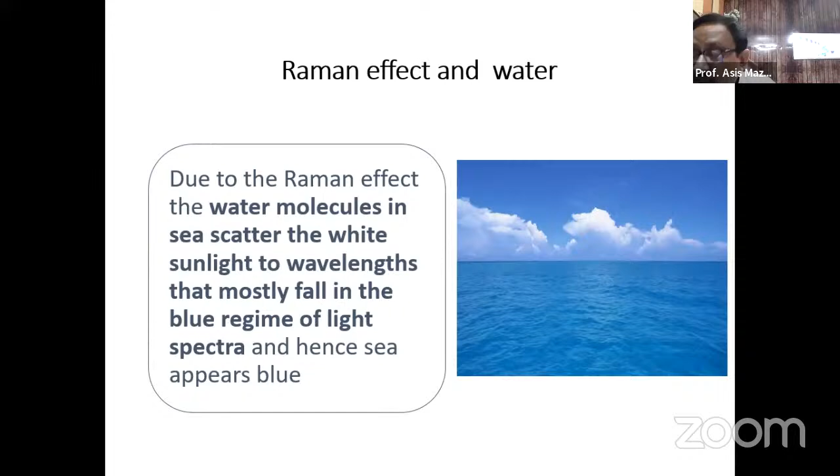The first thing I'd like to show is that due to the Raman effect, the water molecules in the sea scatter white sunlight to wavelengths that mostly fall in the blue regime of the light spectrum, and hence the sea appears blue. So the first slide I have chosen is why the sea appears blue, and this has been found with the help of the Raman effect, showing how the presence of different molecules can influence the wavelength of light.

Now you see the true elixir of life. Initially I took only some salient points from his write-ups. One is that humankind has always searched in vain for an imaginary elixir of life. What we try throughout life is to get something, Amrit. We want to find the Amrit Kumbha, so that by taking a drop of it, we can become immortal.

Am I audible? Am I not audible? Hello? Am I audible? Yes sir, please continue. Okay, okay.

That's why I'm telling you, even if we take some drop of the elixir, we can achieve immortality. But Raman nicely found out the true elixir of life, and that is nothing but water. This single liquid can change the entire scene - our existence, our progress, our development, everything depends on water.

He remembers standing on the line which separates the Libyan desert from the valley of the Nile in Egypt. On one side was the Libyan desert, on the other side, life in Egypt, with the Nile flowing in between. It is very important how we could utilize water for our existence, and how water is important for a civilization to exist. On one side was a vast area covered with sand without a speck of green or a single living thing; on the other, one of the greatest, most fertile and densely populated areas of the Nile.

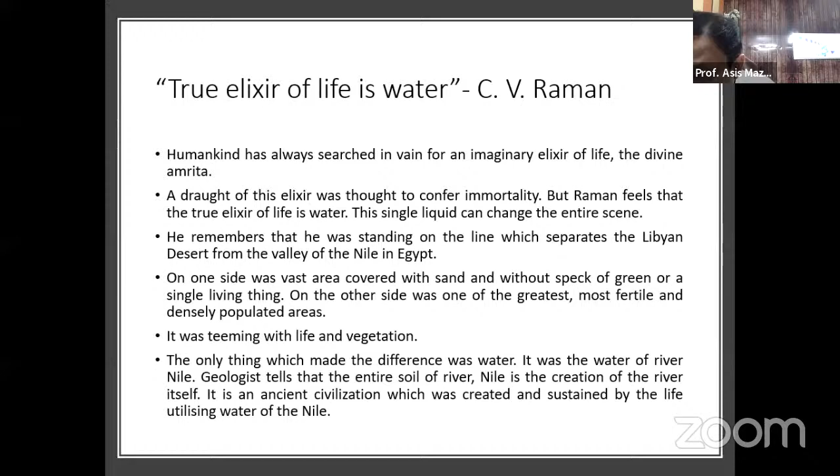We take this common substance for granted in everyday life, but we forget that water is the most wonderful thing on earth, as Raman has told. Most importantly, agriculture, everything, our survival, is dependent on this water.

He has also highlighted the useful and important way how southern India utilized rain-fed tanks. Nowadays we are talking about rainwater harvesting. The Chola regime in South India were the pioneers of introducing big rain-fed tanks and how they were useful in conserving rainwater. So water conservation - we already have shown the path to the world. This is one of the very initial places in the world where the rainwater harvesting concept worked, and successfully worked, for South India. There are other regimes also in other parts, but first is South India, the dynasty of the Cholas.

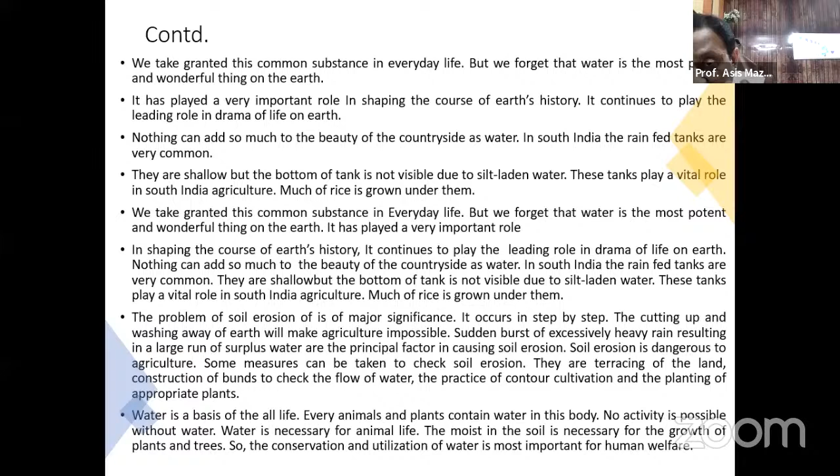Next, if we try to see, he has even written about the problem of soil erosion, how this is becoming an important issue, how we are getting the problem of sedimentation - so many things he has mentioned in his two-page notes, which I have gone through. I am really cherished that our Sir C.V. Raman did so many things, so many concepts, during the 1930s or before.

Now, whatever we are trying to do, let me discuss it. Before going to all the theories, I'd rather prefer to discuss the small things I have done through different projects in the rural areas of West Bengal. I would like to discuss some issues and challenges, but mainly the two case studies which I am fortunate to have implemented in the field. This is embedded with research, but the most important research to me is application research, and that is what I tried to do.

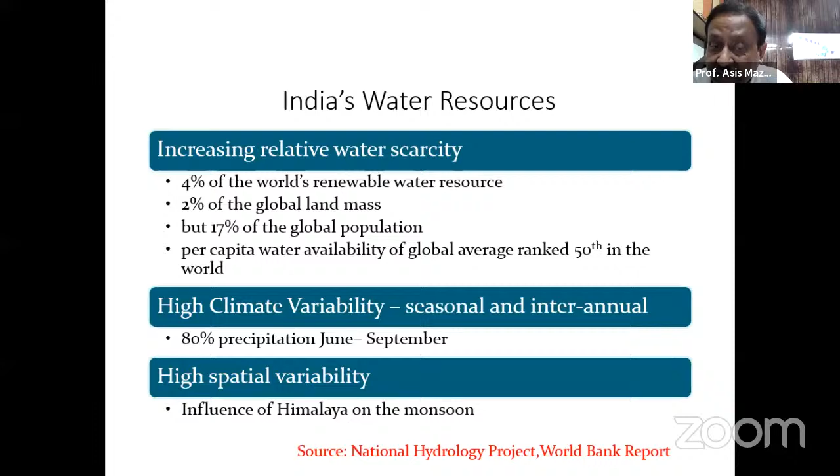Spatial variability is also important, as I've told you. There are a lot of water resource issues in India. I'm going by the headlines - water is critical for our livelihoods. We need water supply, sanitation, and food security. These should be an integrated approach, because that is very important. Today's theme of National Science Day is that these should be taken in an integrated way, not separately. We have to converge our different efforts, because they are interlinked. That is very important.

Water is critical to economic growth in many sectors. Also, our water resource base is stressed because our population is increasing, and with that we are also polluting - understandingly or without understanding, with greed - and that needs to be checked, controlled, monitored, and treated. That is very important.

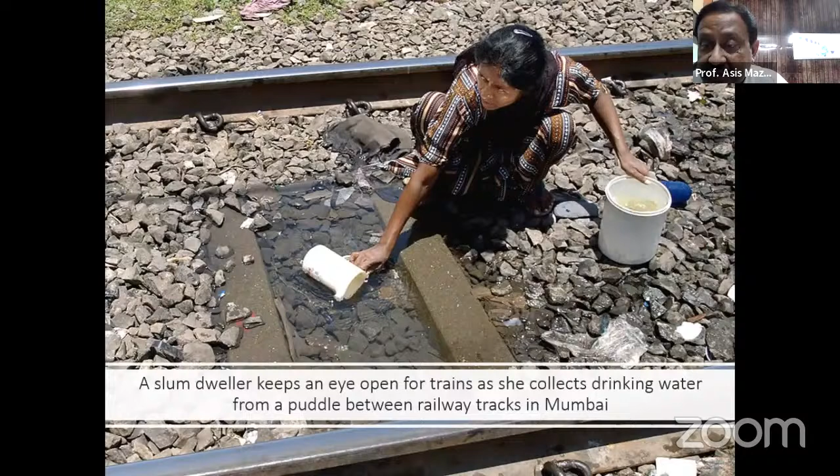You see, one of our mothers is taking water from a puddle between the railway tracks in Mumbai. That is also one of the things we face.

There's a groundwater bill, innovative irrigation, global partnerships, and NITI Aayog has sought to establish a composite water management index for the country. This index is expected to create a public national platform providing information on key water indicators across states. But every administration, in any state, has to come up to reach the national goal, because without this data you won't be able to do anything.

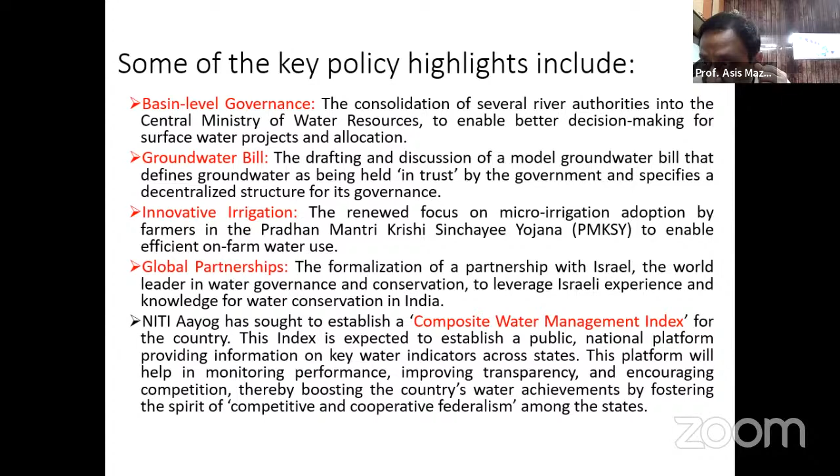And you see, this is the depth to water level map. This is all available.

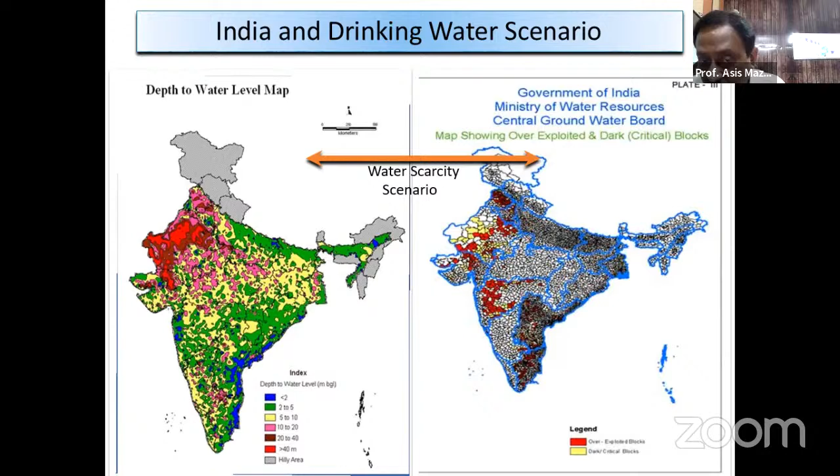I'm not telling you anything false, even I got this data from governmental websites only, but still I'm telling you to show you what is the water scarcity scenario we are facing now, and this is the arsenic and fluoride contamination.

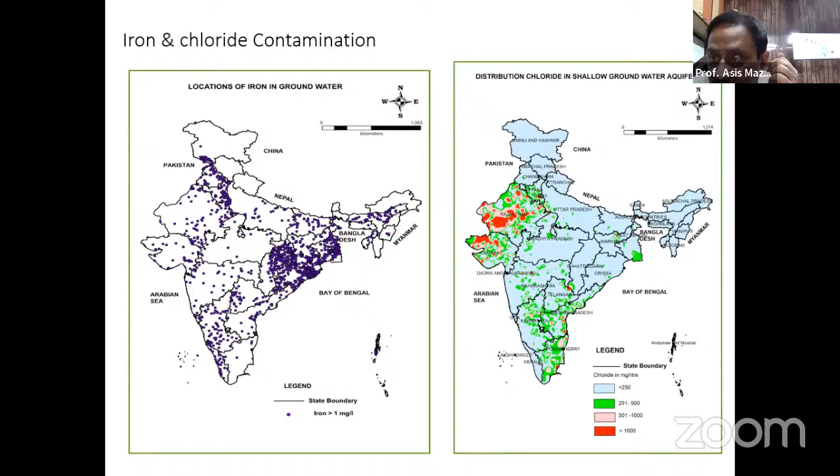Even chloride contamination is there, apart from the other contamination I've already mentioned. So what I want to say here, rather I would like to go to this.

This is what is known as the Ganga Brahmaputra Meghna basin. If you see our GBM basin or Ganga basin, you will find that it has hotspots of different things. Our Ganga basin, starting from Rishikesh to the end of it, the Upper Ganga, Middle Ganga, and Lower Ganga basin, you will find the critical hotspots I tried to show.

Our present government has initiated a process under Namami Gange, or the Clean Ganga mission, and my School of Water Resources Engineering has been involved with this process for the last 4 years, since 2017. We are trying to find out the quality of river Ganga water for the state of West Bengal, while in other states, other academic institutes are doing the same.

In our state, initially only the School of Water Resources Engineering was involved, but it was very difficult for us to cover all these things, so we are increasing the ambit and other institutions are joining. Now, how are we doing it?

We basically try to find out what are the gross polluting industries. Gross polluting industries are those which have the potential to pollute grossly by discharging their effluents, if they have a BOD load of more than 100 kg per day because of their production capacity. These companies are called grossly polluting industries.

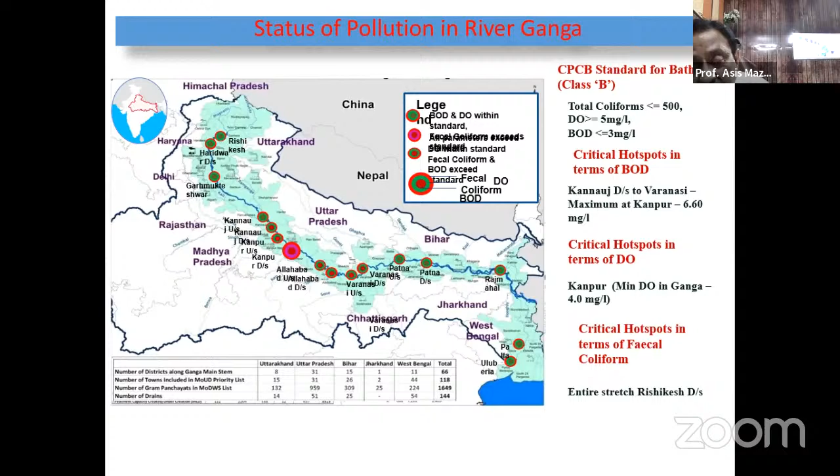This program is being implemented holistically, and it is a flagship program of the Government of India. It was approved in June 2014 with a budget outlay of rupees 20,000 crore. The main objective is effective abatement of pollution, conservation, and rejuvenation of the national river Ganga.

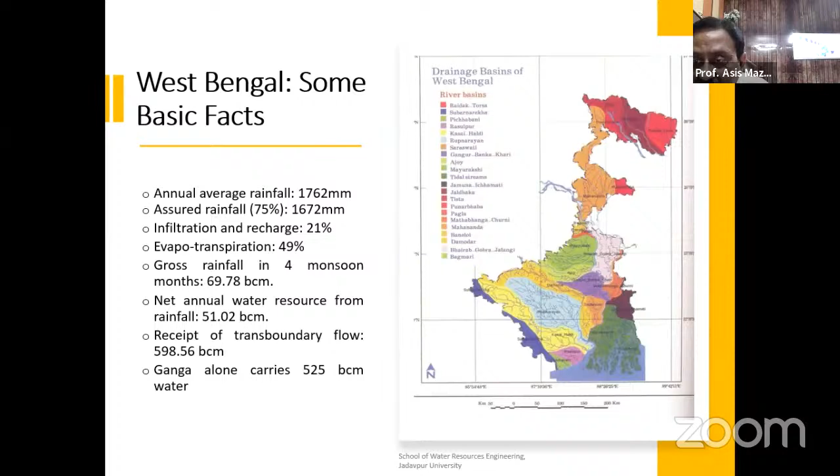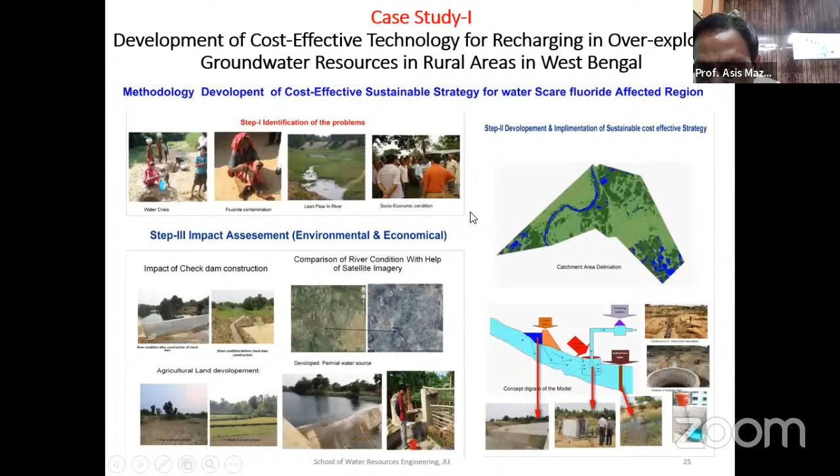These are some of the basic facts in West Bengal, but I'm not going to cover all these things. Rather, within 2-3 minutes, I would like to sum it up with the help of some of the work that I did, showing the scenario and how we have done it.

This is an area known as, basically the district is Purulia, the block is Kashipur, the Gram Panchayat is known as Simla-Dhanera, and the village name is Ghutlia, in West Bengal.

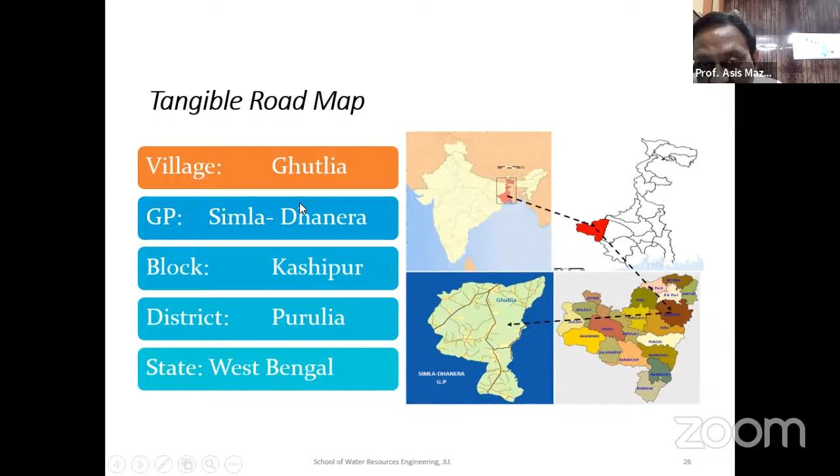We did a literature survey, data collection, data analysis, model development, output and results - everything we needed to do.

But prior to that, the most important thing was the pre-designed field survey and PRA. One of my students, during his Masters of Engineering, went to the field because he was from that area. I took advantage of that and told him to do these things for his thesis work, and in future, if possible, he may do a PhD also, because here we will establish something. We have to demonstrate something.

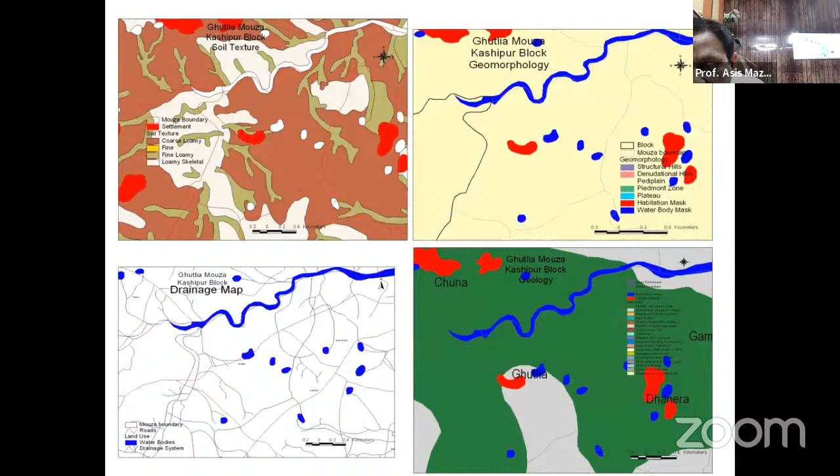So we did so many things, trying to find out how we can develop a model, and we have done it. I'll show you this drainage map and others.

Another step is the selection of a sustainable water source. This is from the riverbed - I'm telling you this experience we have from the riverbed itself. We took water out of the riverbed, because this is also called base flow.

This is the riverbed of Damodar. You see, the water obviously flows during the monsoon, but during the dry season there is no flow of water. We checked how much water is there.

The government of West Bengal requested their public health engineering department to find out certain locations from where they can extract water for the supply water treatment plant and then supply to the villagers. It's a small group of water treatment plants being established under a World Bank project. So that was one of the works I did, to find out how much water can be taken out from this.

And you see the TDS - the TDS here is so nice, less than 40 to a maximum of 70.

So if you take the water from the riverbed, you are trapping the flow which otherwise you won't be able to see. Before it recharges the other groundwater, it's better we utilize it, because it is getting replenished or recharged through the river during the rainy season.

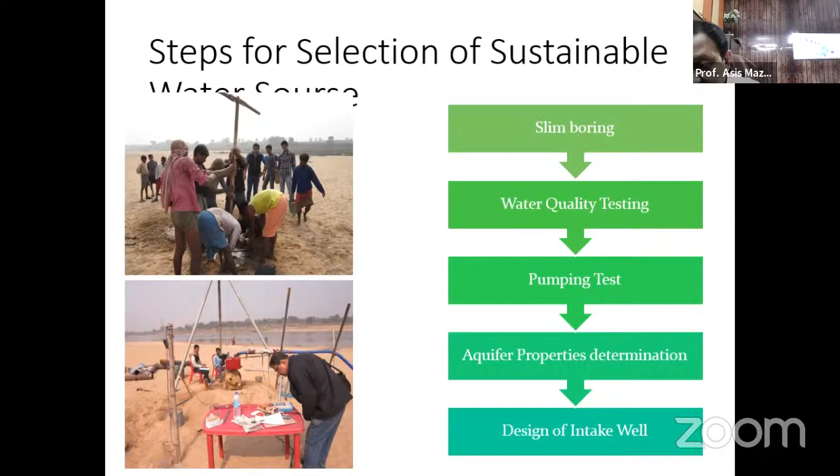However, this is what I did in the Putiari river that I am talking about - the runoff is coming like that. What I did is I put a check dam on this river, and then I also put a dike. This dike is nothing but a wall below the river bed.

The check dam is there to collect the water that gets accumulated over here. Whatever surface flow is taking place cannot go directly passing it laterally - it has to go sideways.

So what's happening is the bed is getting recharged, and potential recharge is taking place through the lineaments, because this is basically a rocky region. Just below the river bed, only about 2 to 2.1 meters, there is soil, and after that you find rock.

And through that rock, we used to send water through what we call a fault, or sometimes a lineament in geological terms. So through that, this water is getting recharged, and the foothill - because it's a slopey, rocky region of Purulia.

You see what sort of changes we have done - there is a collector well which has been connected to this. Water is collected and pumped.

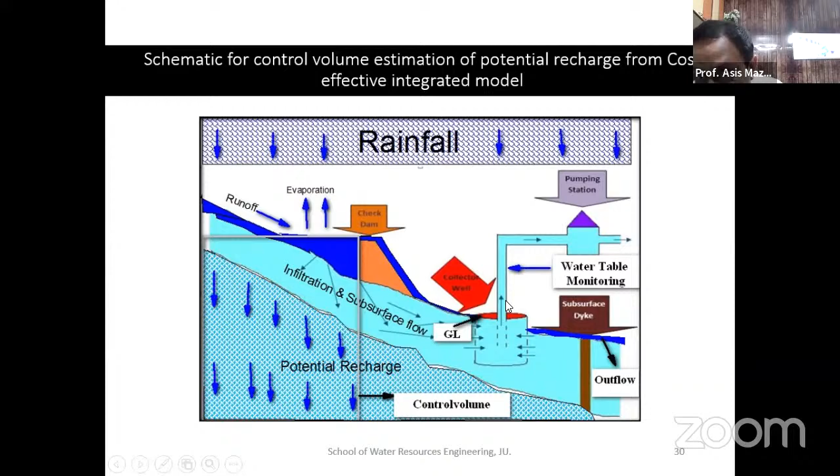And this is now being maintained by the Panchayat - we have handed it over to them, and it has become a source. Initially, there was no source at all.

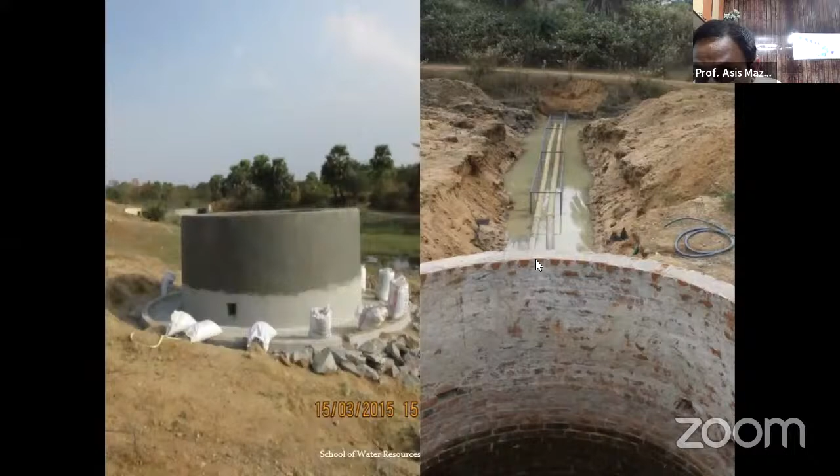After that it has become - I am showing you what it was earlier, the river. Now it has become like this. We are drawing the water.

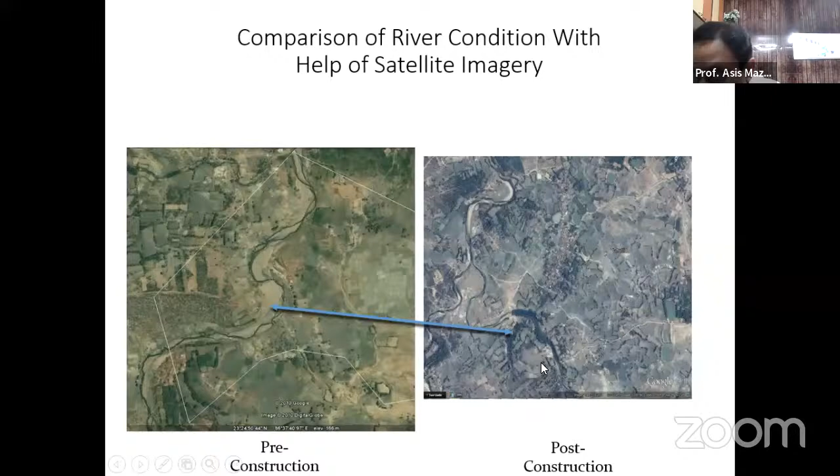It's a radial collection. This is the dike, as I'm telling you, which is a wall. You see what it was earlier and what it has become - that is pre-construction and post-construction. That has given me a lot of satisfaction.

The people there were very happy. You see the river condition before construction of the check dam, and what it has become within a year.

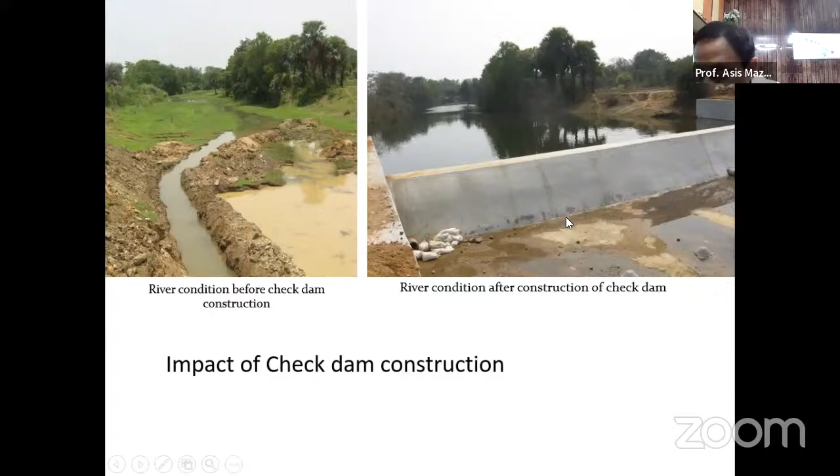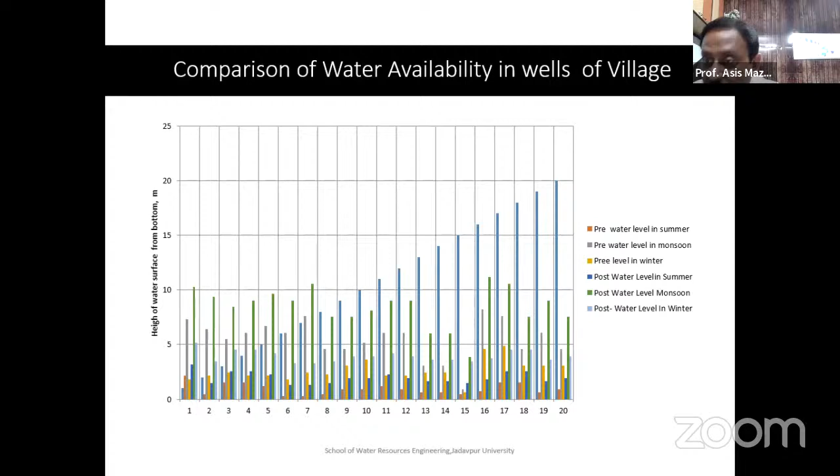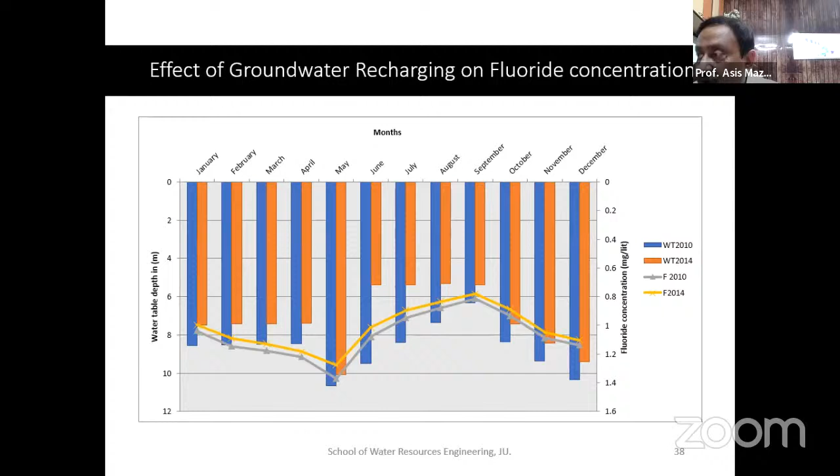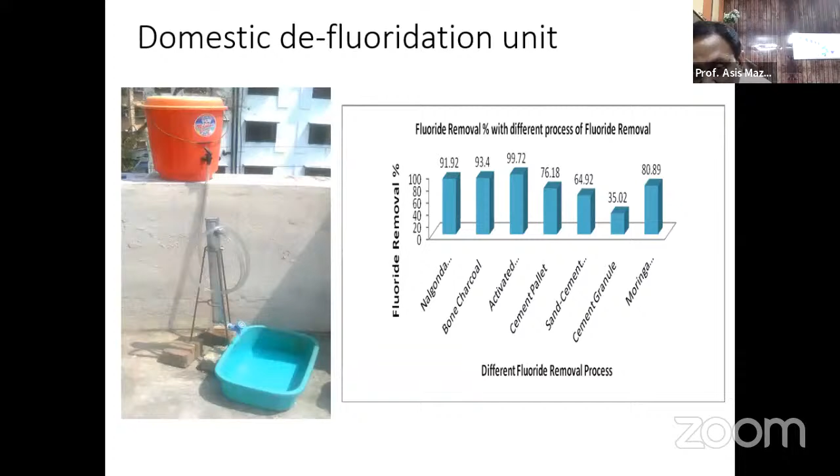That is what I'd like to share with you. We later checked how recharging is happening in the other areas, and we find that the water level is increasing to a great extent. Obviously you cannot achieve everything because it's a small project given to us, but still you will find an increase in recharging and groundwater level coming up. And that is very, very important. Fluoride contamination is also getting less because it is getting diluted through the recharging. This is one of the domestic demonstrations we did, even on the roof of my building, that I did it.

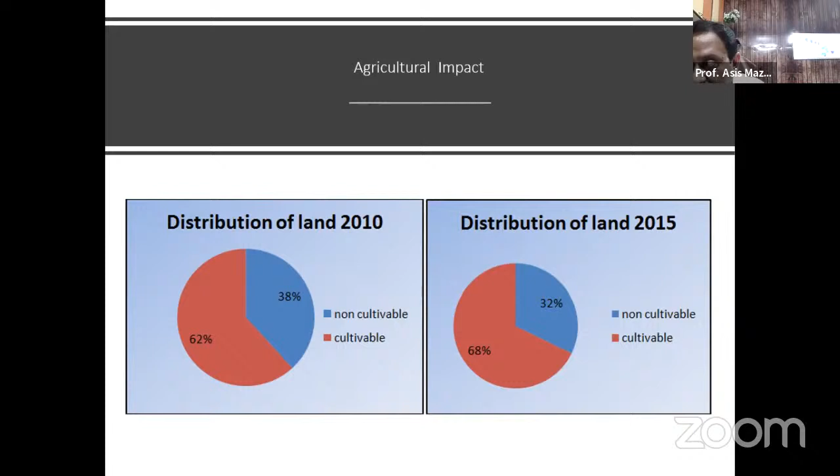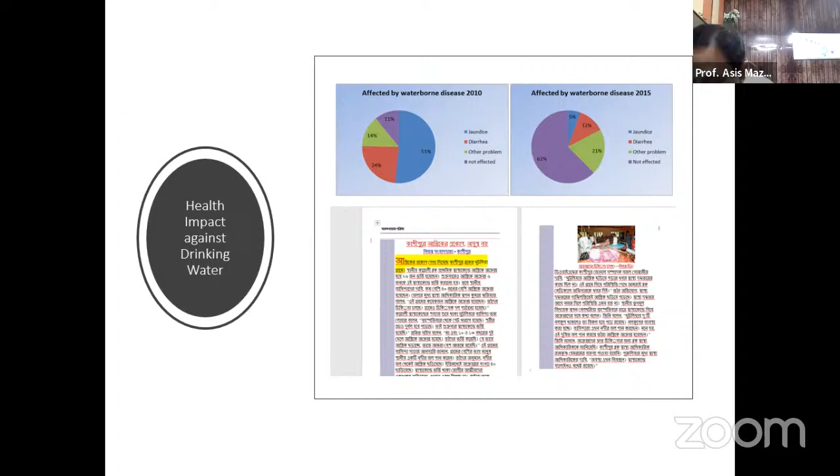All of us tried to develop something together. Our Indian consortium funding was given by India - although it is an India research project, the Indian consortium funding has been entirely given by our Government of India, and the European consortium was funded by the EU.

There we did this work, basically in an arsenic contaminated area in Murshidabad, very close to the graveyard of Sirajuddaula, known as Khoshbagh - it is about 1 kilometer away from that. It is a village which is affected this way.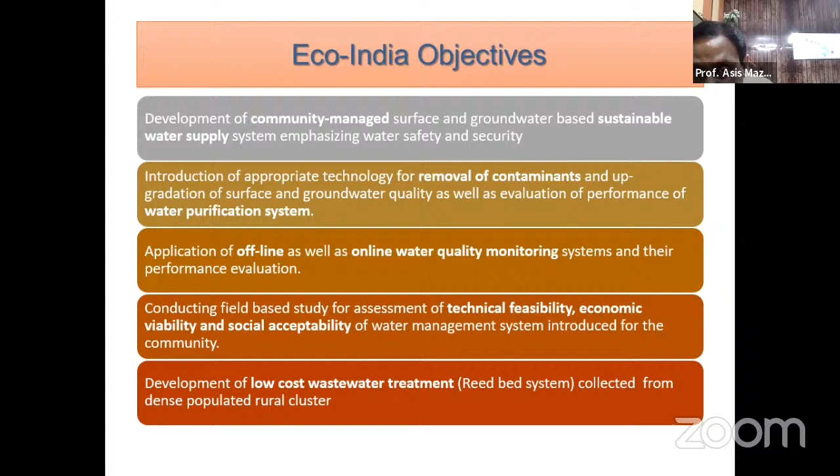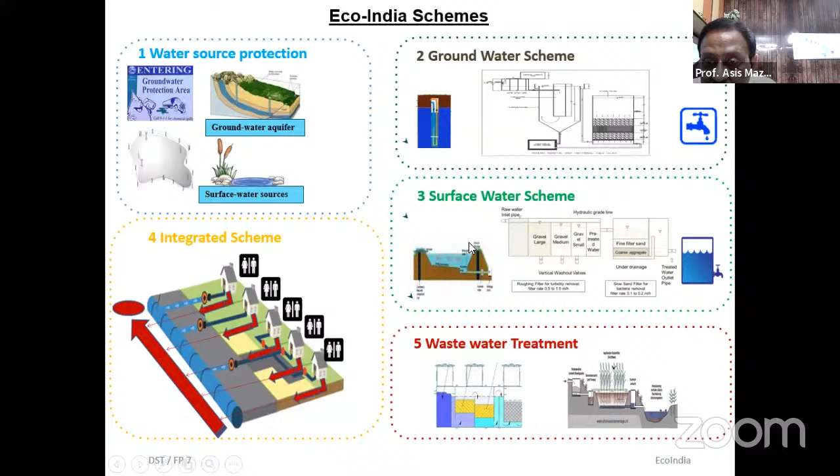So there we did both groundwater treatment, removing the arsenic, as well as surface water treatment. These were helpful in supplying water to 2,000 people. This is the water line that we distributed from the overhead tank we established there.

In one way, the Indian approach I did was cost effective and sustainable. What the Europeans did is also good, but the thing is, when I know they will leave the country after the project, I am answerable to the villagers - if they say, sir, whatever you have done, today we are not getting water, that sort of thing should not happen. So although I am able to give water to 4,000 people, I am committing to 2,000. The reason being that the other 2,000, supplied by the European groups, may not be sustainable.

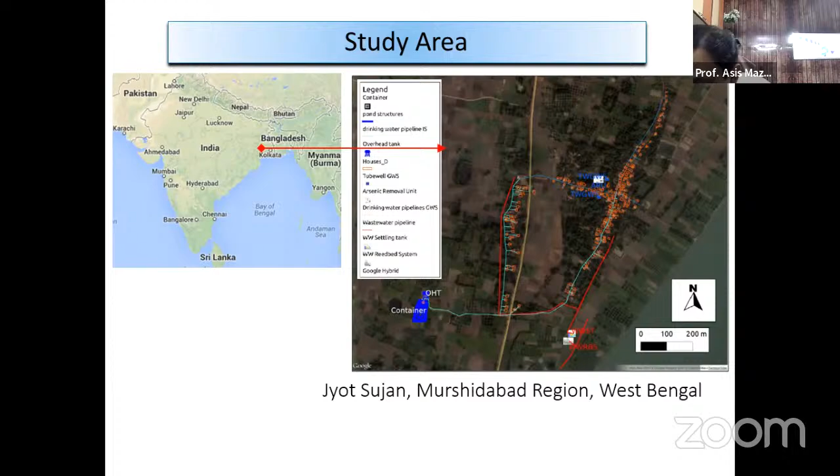The reason is that after the project we won't get it free, because here the sand is free, while they are using glass. The role sand plays in water treatment is the same role being played there by pulverized glass, and that has some benefit too. I'm not saying there's no benefit, but in India we have an abundance of sand, while they don't have sand. So why not utilize our sand in the step of filtration?

Today I'm not going to detail all these things because it will take time. I've already taken much of your time, but I'm telling you, first we did a lot - I initially developed the total watershed, and this is the water treatment. This is our unit.

This unit is our unit. It is totally gravity driven, no power is required. It is a slow sand filtration system. We have a horizontal roughing filter bed followed by an SSF bed.

And then we use activated alumina, charcoal, all these things, and then we give very good water. We can monitor it online with the SCADA system, which has been provided by our Israeli counterpart.

We are able to give really good water there itself, and now it is being managed by the local villagers. They are getting 30 rupees from each family per month for supplying this water. So it's nice to see that this is still working.

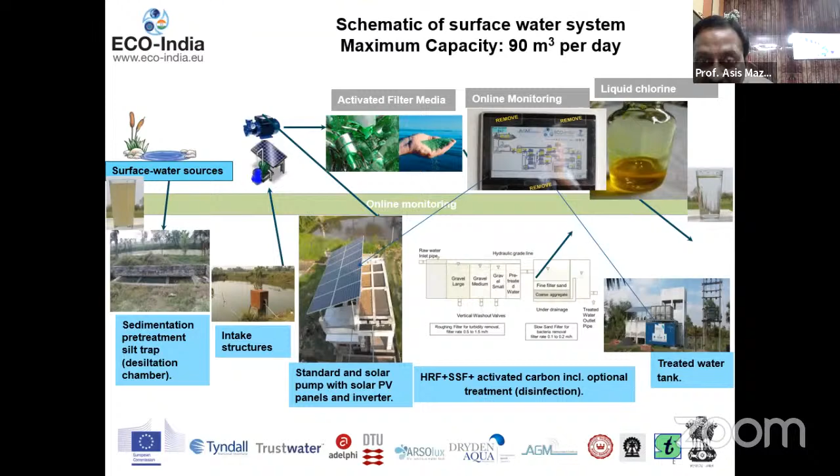I am requesting, if anybody can go to Murshidabad or this area, please visit and see it's possible to change the rural, water stressed areas. You can supply water. You only need some basic management for the development of the water source.

So this is the area we have taken, and we have guarded it, because I do not want the cattle to come and people to wash or bathe cattle there, because then obviously it will defeat our purpose. So it is protected, but everything is done very simply.

This is what the Europeans have done with the help of a container. That's a lot to discuss, but that is not needed now. We have done a very simple thing with the help of a solar system, and it is being run that way.

This is our overhead tank, which is just behind it, and from there the water goes by gravity to different standpoints which we have set up throughout the village.

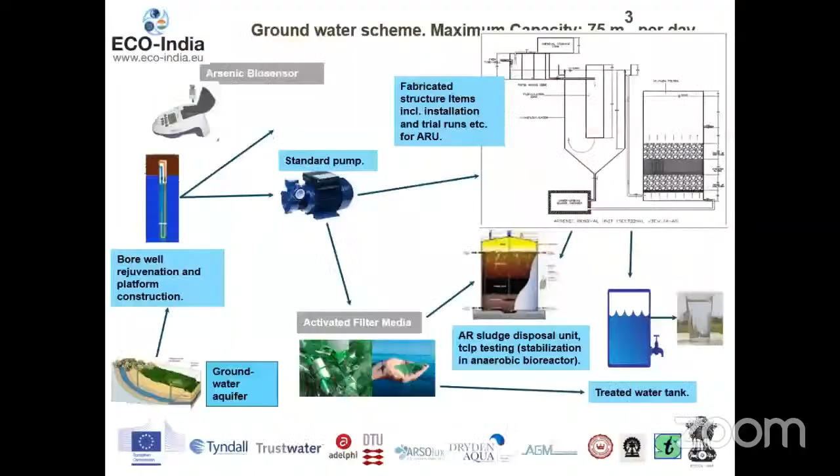Thank you very much. I think I should conclude here itself.

This is another arsenic removal filter for groundwater. We are removing arsenic from the groundwater there itself. This is our technology, and it is working very nicely. There is also a European intervention, but I am telling you, this is quite possible to deliver.

And the people have come forward. This area was given to me free of cost by a particular villager. He is not a rich person, but he has come up with this. Very nice of them, and it is possible if we try to make interactions with them.

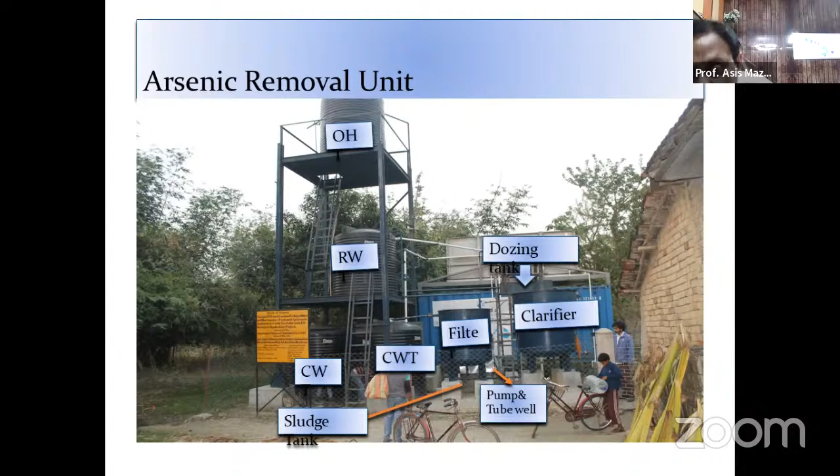If we make a good participatory rural appraisal, you will be able to convince the people, and we were able to do that. But it took one year initially to make them understand what we want to do for the betterment of their life. That is what I would like to conclude.

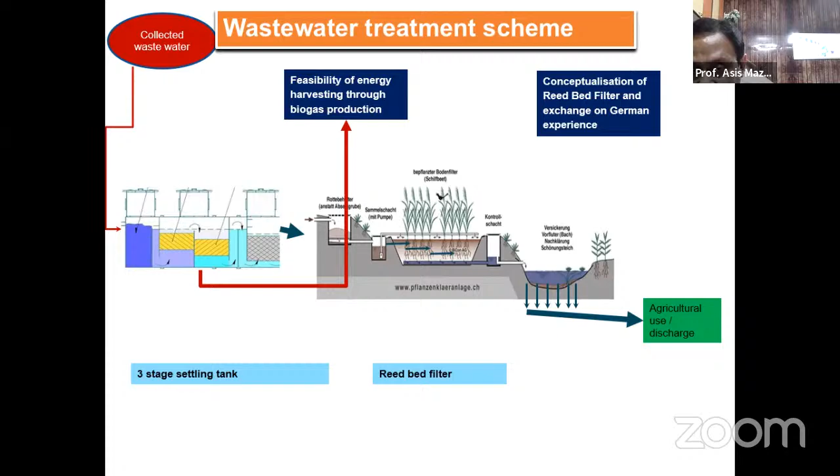These are the specifications. As I am telling you, it's an integrated approach, so we need to treat the wastewater also. This is a simple phytoremediation that we've done there itself, so after that, whatever water comes out would not be bad.

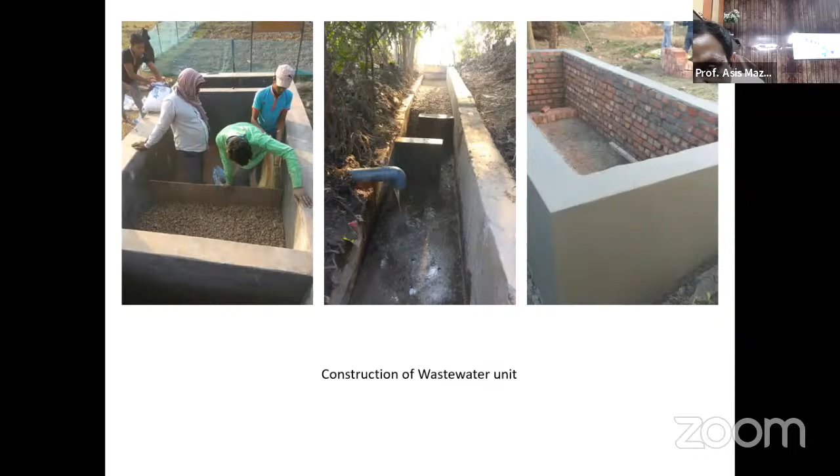And this is the phytoremediation. With the help of this, people are all working on the field itself.

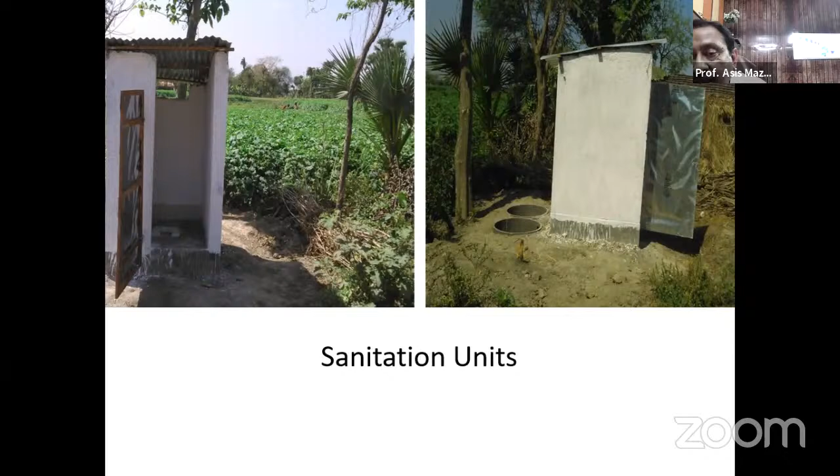We did certain sanitation units also, because we want to prevent open defecation, otherwise our basic purpose would be totally defeated. So this is how we have arranged it, and it is very nice that we have started the work.

It happens that it starts with a masjid, and where it ends is our mother temple, the Ma Kali temple. So it's nice, and the people are taking this water. It's really a lot of benefit we got from this.

I would be really happy if anybody has any interest, even to visit the site. I will be happy to help them reach there. Thank you very much.